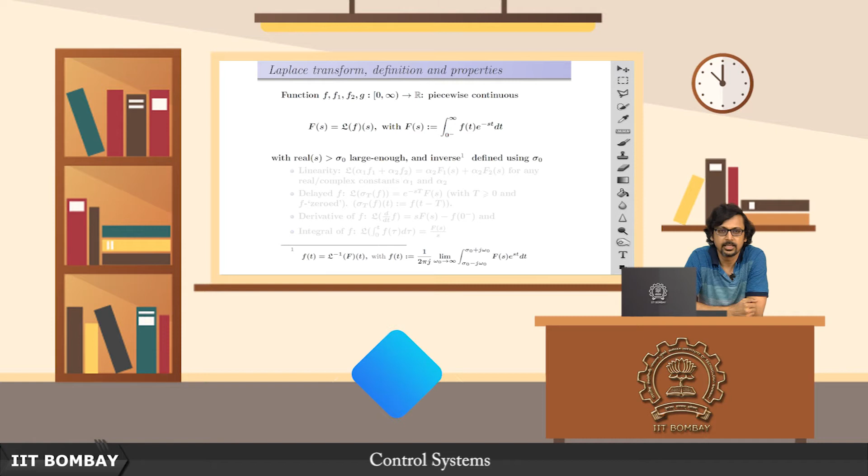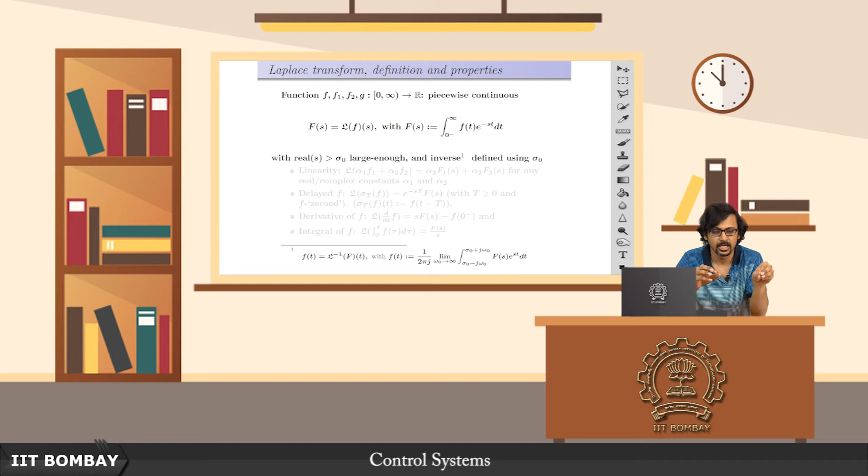In the preceding lectures we have seen how properties like linearity, time invariance and causality of a system play an important role in enabling us to play around with certain properties and to infer about the response of the system for a given input. This is not a trivial question because for different inputs your system will have different kinds of outputs. Only when it is linear can we play around with this, and based on our knowledge about the response of the system to certain signals, we can cook up the response for a linear combination of those possible input signals.

We have also seen the importance of properties like time invariance, and especially its role in enabling us to ascertain the causality of a system given that a system is time invariant. Now where does all of this lead us to?

Towards the end of the last lecture we mentioned something called Laplace transforms, which I am sure many of you are already familiar with from an earlier course on mathematics or signal processing. Nonetheless, in this course on controls we shall look at Laplace transforms in probably a different light to what you have seen thus far. So let us focus on some basics about Laplace transforms, such as the definitions and properties as they are visible on screen here.

For functions f, f1, f2, g, which are defined over the domain from 0 to infinity, basically all possible values of time mapped to some real value, and which must be piecewise continuous, the Laplace transform of such a function, given by big F when the original function in time domain is small f, is defined as the integration from 0 minus to infinity of f of t times e to the power minus st dt.

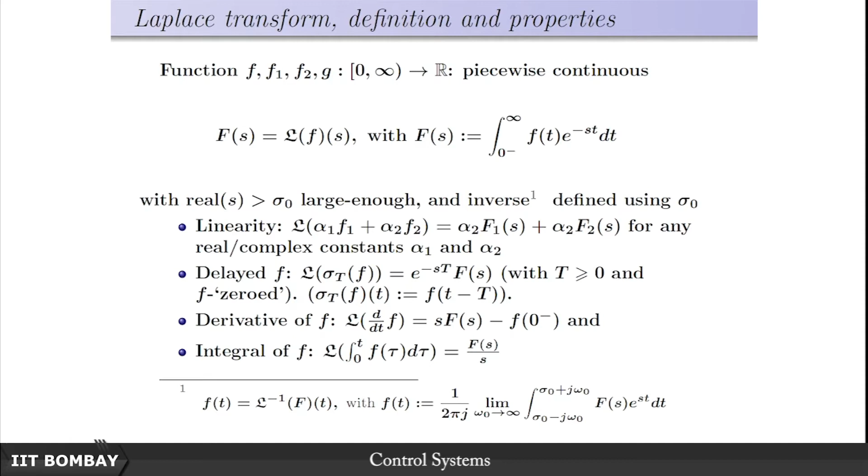Luckily and thankfully, this is not the formula that we shall be using in order to obtain the actual Laplace inverse. But more on that later in some later lecture probably.

Okay, then there are certain other properties which we shall see in this lecture, and why they are significant. One is convolution. It turns out that the convolution operation in the time domain is defined where you integrate from minus infinity to infinity f of tau, g of t minus tau, d tau. The Laplace transform of this convolution of two functions turns out to be the product of the Laplace transforms of the individual functions. Again, this will be important.

Then there's something called Dirac delta. Of course, in many standard textbooks they call it a delta function. I take certain exception to the use of the term function very loosely, because in reality this is something called a distribution. This is not a function in the conventional sense, mostly because at this point it suffices to know that normally a function is defined in a certain manner.

You have a domain of the function, you pick out some element from the domain, pass it through the function, and you get a value which belongs to the range of the function. Dirac delta is not something that's defined in that manner. Rather, as you can see, it is defined by what it does to a function. So Dirac delta is not defined by picking something from the domain, passing it through the Dirac delta, and seeing what's happening in the range.

Rather, you see the action of the Dirac delta on another function, what it does to it, and that's how it is defined. There are some alternate definitions too, but this is primarily a subtle difference. So I wouldn't call it a delta function, although most textbooks would probably do so.

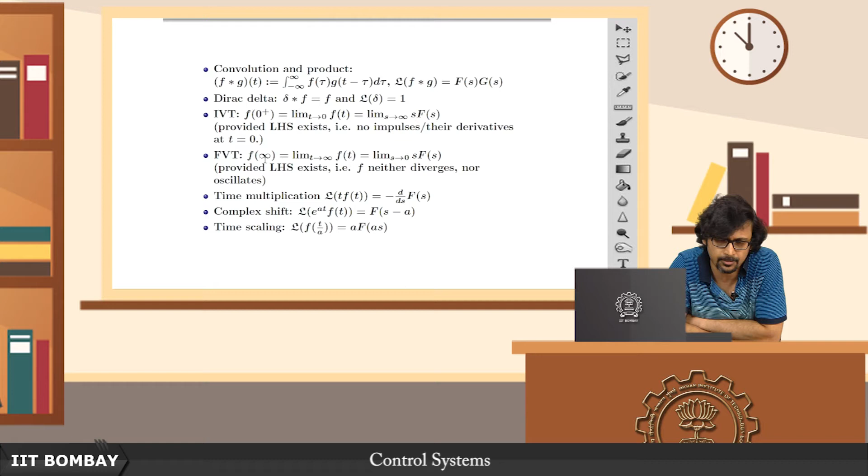Then of course there are those three properties: time domain multiplication, complex shift, and time scaling. These are standard properties that you will find in any textbook, and I am pretty sure if you have gone through a maths course that covered Laplace transform, most of you are already familiar with these. Nonetheless, this is just a refresher.

And finally here we have some standard Laplace transforms. By 1 we denote the unit step - functions are only defined on 0 to infinity, so it is a unit step. The Laplace transform is 1 over s. Then you have t, which is basically the straight line, a ramp, whose Laplace transform is 1 by s squared. Then you have the exponential e to the at, whose Laplace transform is 1 by s minus a.

Similarly you have the Laplace transform of the sinusoid, the cosinusoid, and also a sinusoid or cosinusoid enveloped by an exponential. These are some important functions, and it turns out that even knowledge about these few functions and their Laplace transforms will enable us to get very far within the scope of this course. So with that we end a short refresher of Laplace transforms, and we will begin discussing some important properties in today's lecture, seeing some of those results we've already seen in some new light. Hopefully this will shed new light on what you already know.

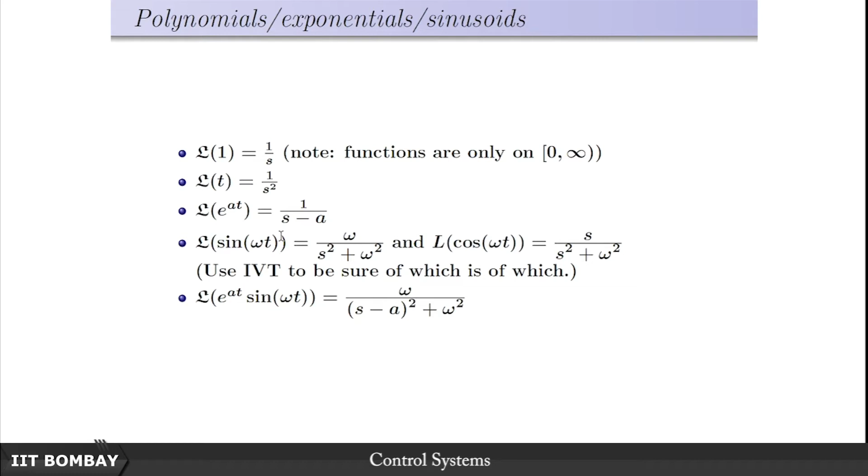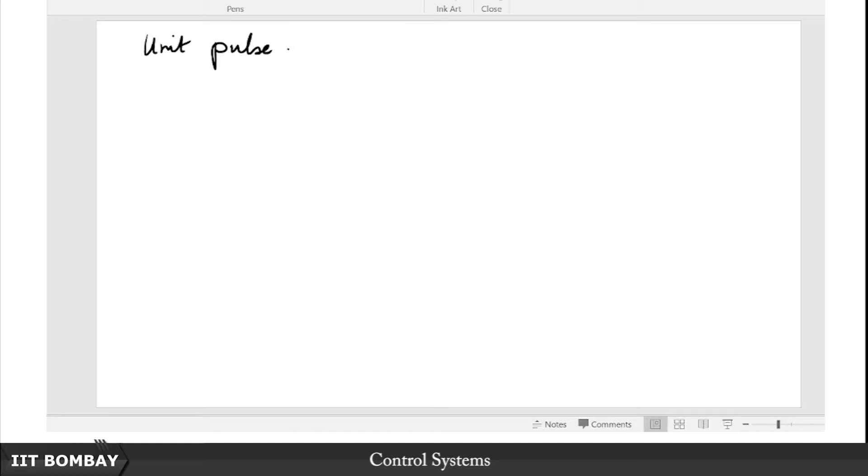At the beginning, if you indulge me a bit, I will discuss something which may not at first glance seem very relevant to what we have seen so far concerning Laplace transforms, but shortly we shall begin to see the connection, I promise. So let us take something called the unit pulse function. Just indulge me a bit and carry on with me on this journey.

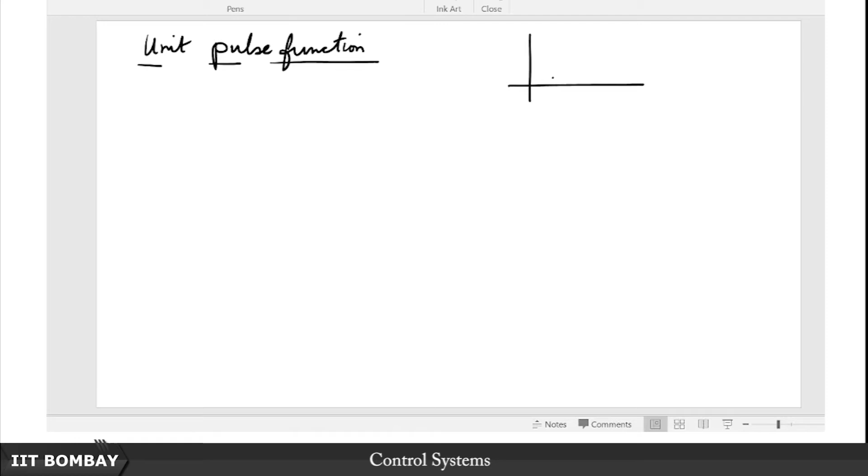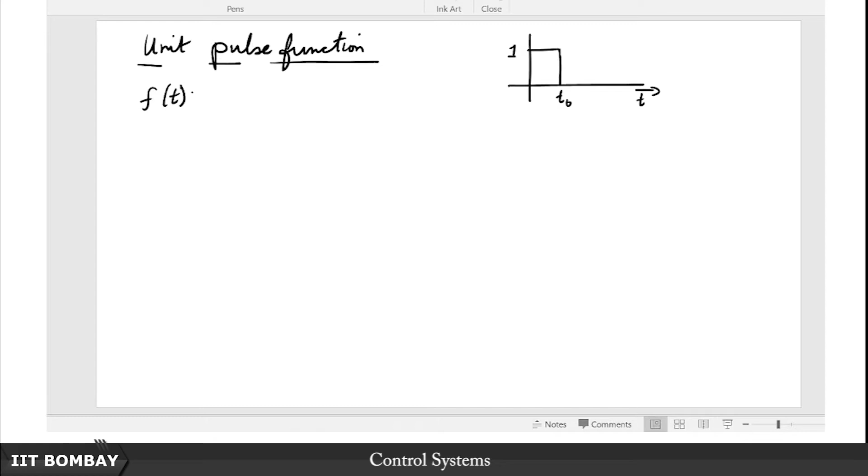How do we define a unit pulse function? The sketch of the function would look something like this. If this is the time axis, this is magnitude of 1, and this is the pulse function - let's say this is t naught on the time axis, and this is what the unit pulse function looks like. So how do we describe this? If you want to describe this mathematically, here is how we would.

Remember that the unit step is defined in this manner: I would define it as 1 of t, and it is equal to 1 for all t greater than 0 and 0 otherwise. So the unit step looks something like this.

Now if I want to compose this unit pulse in terms of the unit step, how do I go about doing this? Let me just correct that a bit.

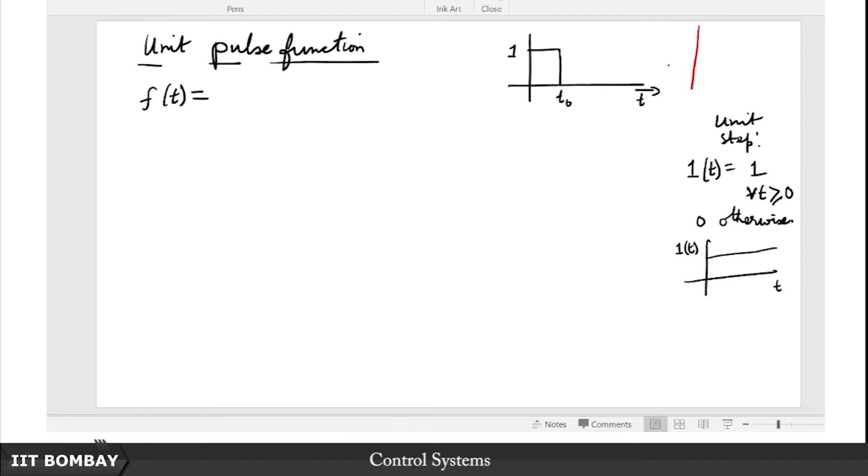So this is greater than or equal to - just a subtle point, but it is important. So how do we then define this? Think of this composition: let's say you have a unit step going on this way, and then at t naught you start another function, a negative step. The resultant of these two would obviously be something like this, is it not? So this is basically what we are looking for - this is the pulse.

So how do we write that mathematically? Without further ado, let me just write it down here. This is nothing but the unit step, and from that you subtract a delayed or shifted version of the same unit step.

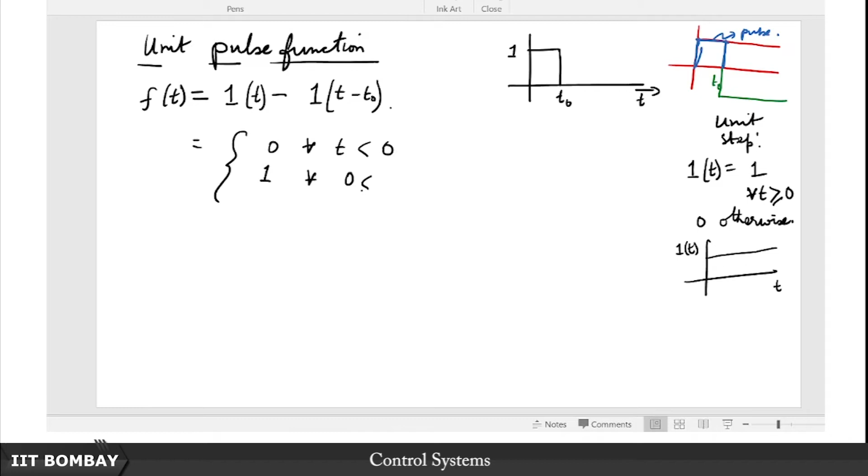So how do we describe this in other words? This is nothing but characterized by the following: it is 0 for all t less than 0, it is 1 for all t satisfying this condition up to t naught, and it is again 0 for all t greater than t naught. No questions about this - this is exactly how it is defined.

Now suppose you want to take the Laplace transform of this f of t. How do we take this? We know that the Laplace transform of this is of course 1 over s.

And what is the Laplace transform of this? This also we know, it's the delay property we've just seen. So this is what it is. In other words, we can write this as 1 minus e to the minus s t naught, over s.

So we'll just bear that in mind for the time being. Let me just write that down: the Laplace transform of f of t is equal to this. This is the point to be taken home from this particular slide and to be remembered for reference later.

So now let's look at some of the properties, as I promised. This will actually help us later on, but first let us look at some of the properties. So for the time being, just remember this result, keep it in the back burner, slowly burning till we need to revisit this. We are sort of trying to cook up the recipe for a lot of things. Let's take a general case.

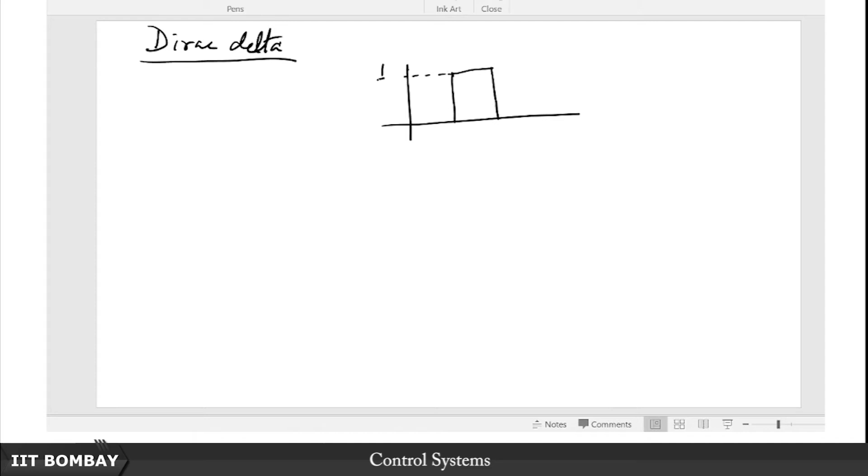Let us first look at something we already know, the pulse we have already discussed. So suppose you have a pulse of magnitude 1 over delta from the instant t1 to t1 plus delta. The area of this pulse is unity, the magnitude, the peak, the amplitude is 1 by delta. So let me define this function delta of t minus t1 as equal to, this is basically this function.

So one way of defining this is, if you look at how we have defined the unit pulse, it would immediately follow that the Dirac delta can be defined, or the approximation of the Dirac delta - we have not yet seen that this is the Dirac delta - the approximation of the Dirac delta can be defined by this expression.

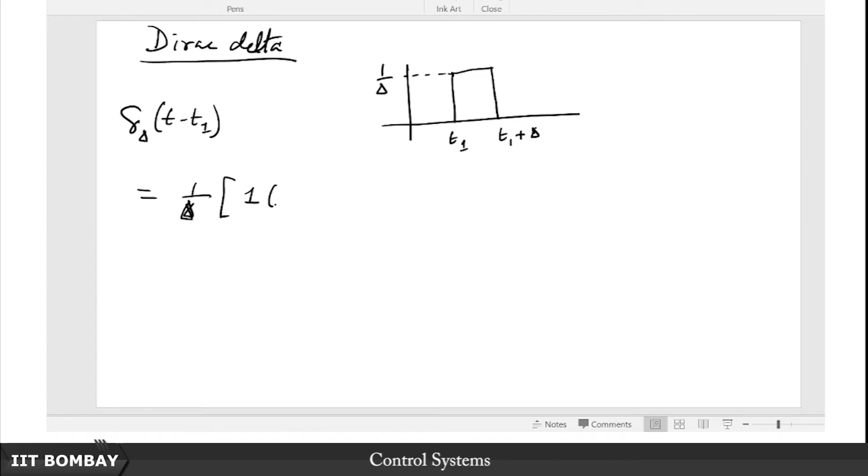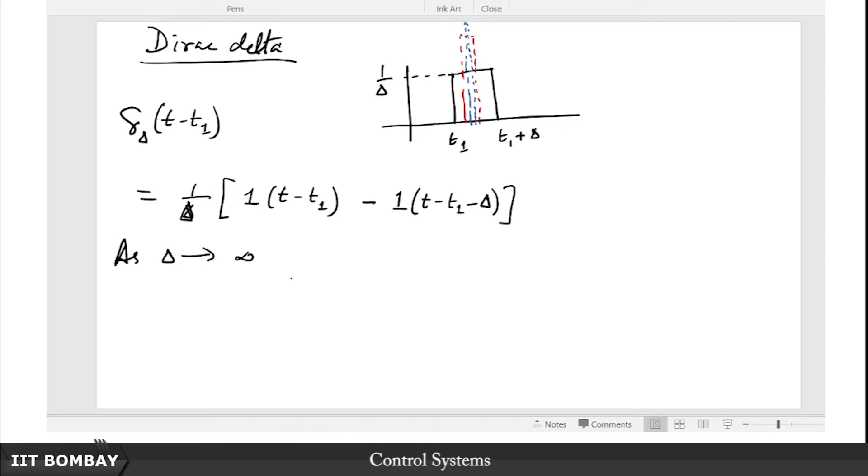I wonder what happens as delta tends to infinity. Pictorially, you can see that this keeps getting narrower and narrower and the peak starts climbing higher. So as you choose a smaller delta, since the area is fixed, you get something like this. Pictorially you can see this, but theoretically what happens here?

It is apparent that as this delta tends to 0, it is not going to be on the center, it is going to approach the left. So as this delta tends to 0, it is going to be like a Dirac delta at t equal to t1. Clearly, as delta tends to 0, this delta of t minus t1 approaches the Dirac delta.

That I hope is at least clear. But what happens in the limit delta tending to 0? In the limit delta tending to 0, the Laplace transform of delta t minus t1 is what we are interested in, and this is the interesting bit.

You see, if you take the Laplace transform of this, this is limit delta tending to 0, 1 over delta, what you have here is e to the minus st1 minus e to the minus s times t1 plus delta. So you can pull out this e to the minus st1, and then what you have is 1 minus e to the minus s delta over delta, limit delta tending to 0.

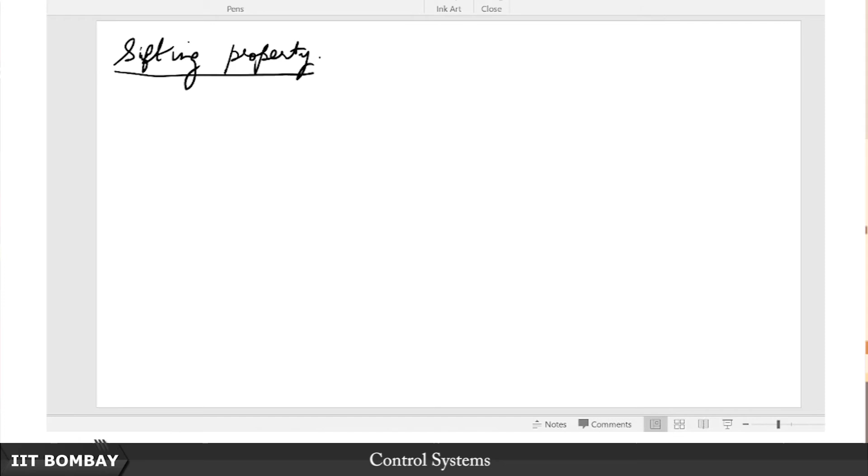An important property of this Dirac delta is the sifting property, so much so that this is also used to define it. If you define the Dirac delta as an approximation in this manner, then the sifting property needs a derivation, remember. But on the other hand, if the sifting property is how you define the Dirac delta, that is, how it acts on another function, then this needs no derivation, it is true by definition. So you should be able to see that the two definitions are actually equivalent.

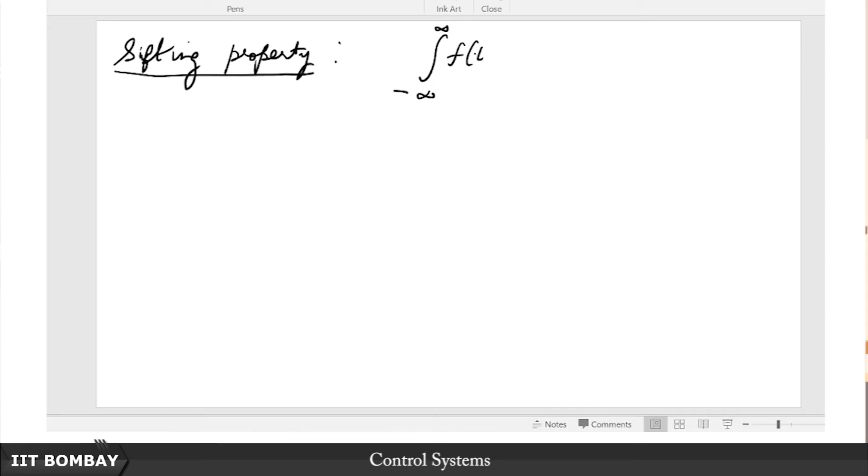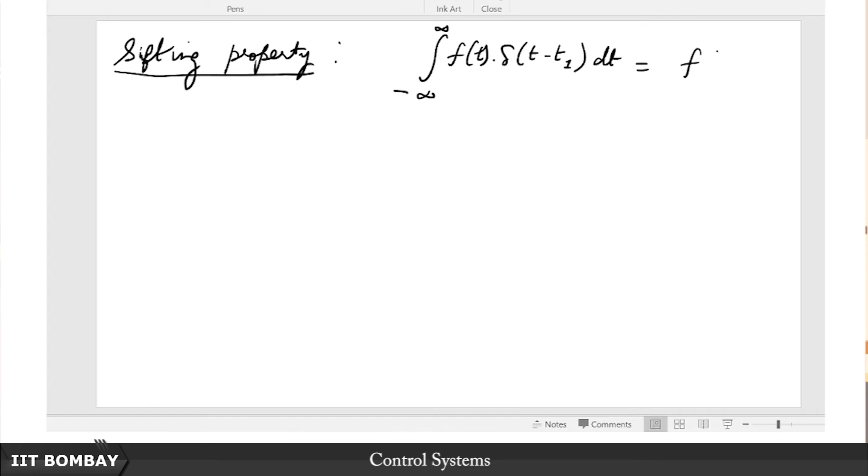So what does the sifting property say? It says that if you take any function f of t and pass it through this sifting or sieving operation, then it is going to pick out the value of that function at t equal to t1. So this is a very, very important property.

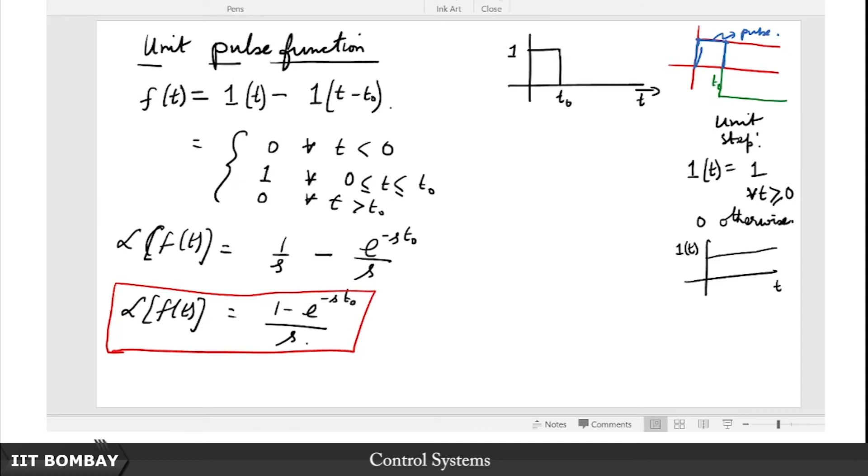Now we are going to look at something interesting, and this is going to be more relevant to our line of inquiry. Consider any signal. Now that we have seen some basic properties, we have seen a unit pulse, we have seen how to cook up the Dirac delta using the unit pulse. In between we have also seen the initial value theorem and the fact that 0 minus makes no difference. Then we have seen the sifting property of the Dirac delta.

Now we are going to see how to express any signal as a train of Dirac delta. How do we do that? This is very important because this is going to eventually allow us to describe the input output behavior of a linear time invariant dynamical system.

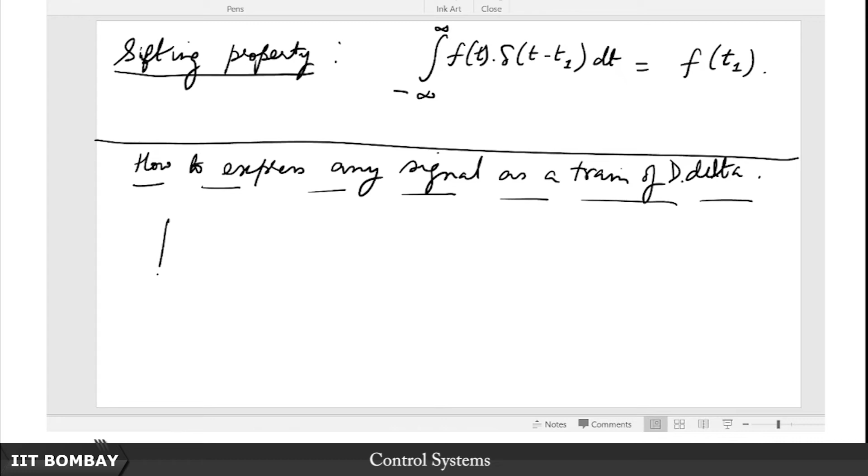So again, as before, we start with a sketch. Let us take a signal, say u of t, some arbitrary signal like this, and like you might have seen in Riemann integration, you split this up into equal intervals, even if they do not look like that. It is exactly like the partitioning for Riemann integration. So you split them up, but if you now focus on each of these individual parts, what are these?

These are nothing but pulses themselves, no. This is like, for instance, a pulse. So let us say that we have split this up from say t0, then t1, till let us say tk.

This is the time axis, and let us call this interval delta, this even interval, equal intervals. That is, t_r minus t_(r-1) for all integer values of r. That is all this means, so it is even intervals, equal intervals, alright.

So now we can cook up another function u delta from u. So u delta t1, or let us say ti, t0, t1, similarly there is some ti here. Let us say we want to find out what is u delta ti. What function is that? Let us say it is just this function, this pulse here.

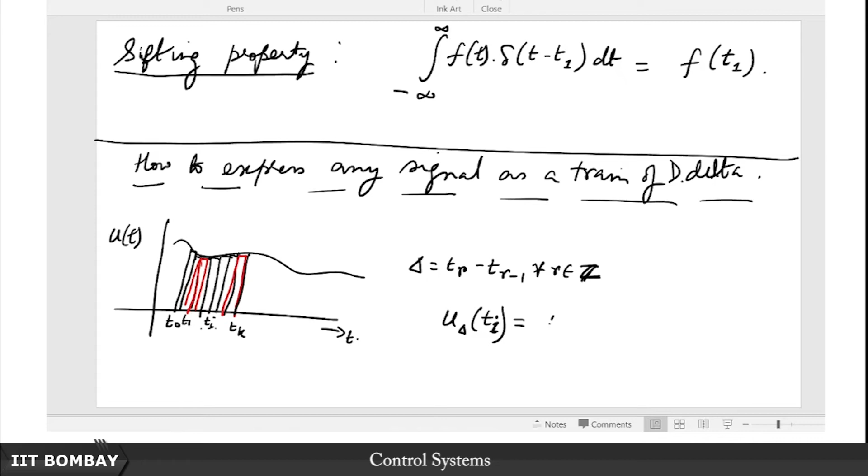Now once we define this as a pulse, we are approximating this as a pulse, we know how to express this pulse. It is very simple. What is the magnitude, the amplitude of that pulse? It is exactly the value of u at ti. So this is the amplitude of that pulse. And how do we express that pulse?

We have seen that we can express this pulse. Let me take you back here. Remember, this is basically a pulse of amplitude 1 over delta. So if you want to make this a unit pulse, you have to multiply this by delta. Remember, we saw this could be approximated to the Dirac delta, but the difference is that this pulse had an amplitude 1 over delta.

Here we want a pulse whose amplitude is u of ti. So when we multiply this with t minus ti, this pulse, we also need to adjust and multiply with delta, because this overall thing is going to be a pulse of amplitude unity, and when multiplied by u of ti, it gives us exactly the pulse of amplitude u(ti). So this is one individual piece, one individual slice.

So now combining all of this, let me cook up an approximation of u(t), which is given by u-bar of t. This is an approximation of u(t), and we can clearly define this through this summation, this infinite summation, i equals 0 to infinity, of course countably infinite, of u(ti) delta(t minus ti) times delta. We have seen that.

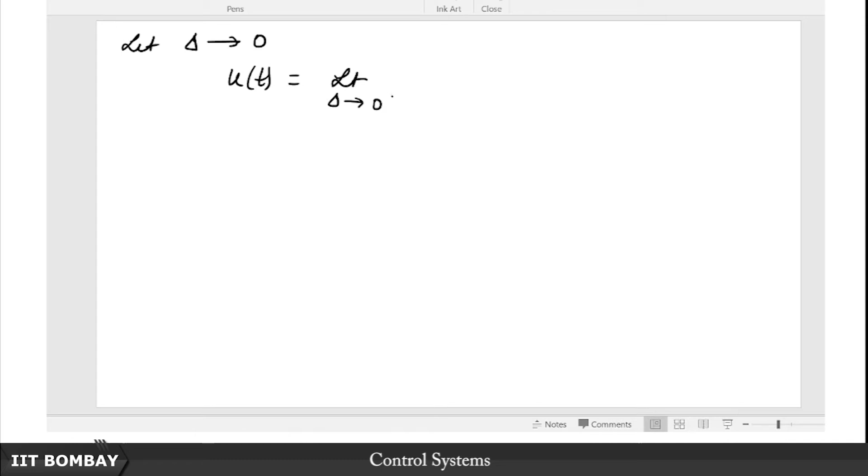So we can write this as the limit as delta tends to 0 of that same summation, u(ti) delta(t minus ti) times delta. But this is nothing but something we already recognize, right? This is basically an integration, is it not? When you let delta tend to 0, this delta term becomes d tau, so we can easily replace this by the integration operation. It might appear a little hand-waving at this point, but as delta tends to 0, this approximates the Dirac delta and gets closer and closer. This delta is like d tau, and u of tau is basically the running variable then.

Alright, so we have seen that this is one way of expressing any signal. But what is our motivation behind doing all of this? Why are we doing this in the first place? At this point let us focus on that.

Essentially what we want to find out is, suppose you apply this input u(t) to a linear time invariant system described by G, then what is the output? That is our question. Can we express this output in terms of the input, and how do linearity and time invariance and all those properties help us here? Now that we have described u(t) in this fashion, we should go ahead and try to do this. So we know that y(t) is nothing but G acting on u(t). Remember in the previous lecture we had removed this third bracket for brevity, but we bring it back now.

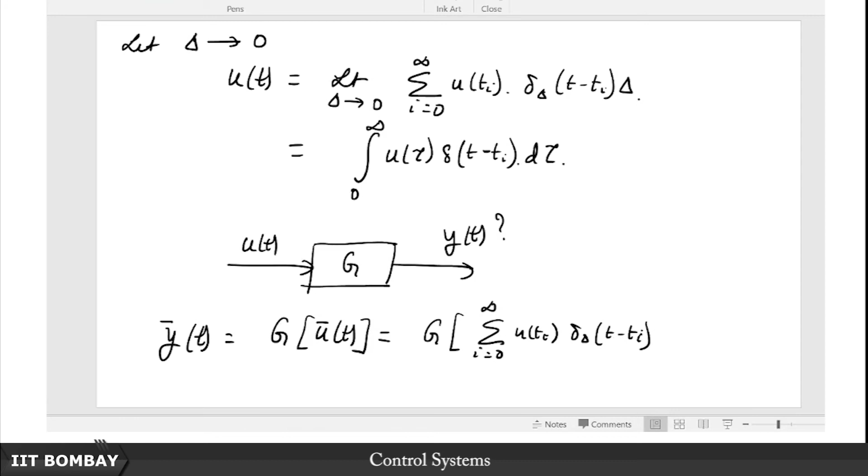So what is this? Going back one step further, let's say we want an approximation of this - we want to find out the response of u bar. So we write this as the summation, I equal to 0 to infinity, of u of ti delta delta of t minus ti. We like a discrete sum because that will help us push through the property of linearity.

We shall see that. Now notice in this sum, if G happens to be a linear system, then the action of G on a sum of these type of signals is the same as the sum of the action of G on individual signals - that is what linearity is. And here what are the scaling factors, the constants? Remember u of ti is held constant over the interval from ti to ti plus delta.

Now remember that in this summation, I can insert this g inside the summation only because this g is linear, and the second point is that this delta is going to be a constant. So when we later transform this to an integral, this delta will play the role of dt or d tau, whatever the running variable is. In fact it will be d tau, as we shall see.

So therefore we have y bar of t, the approximate response, and here is where the smoothness of g is very important, because we are taking infinite sums. I'm not asking you to prove this or get into the depths of what the smoothness of g is, but because we are taking these infinite sums, smoothness is what we concerned ourselves with in an earlier lecture.

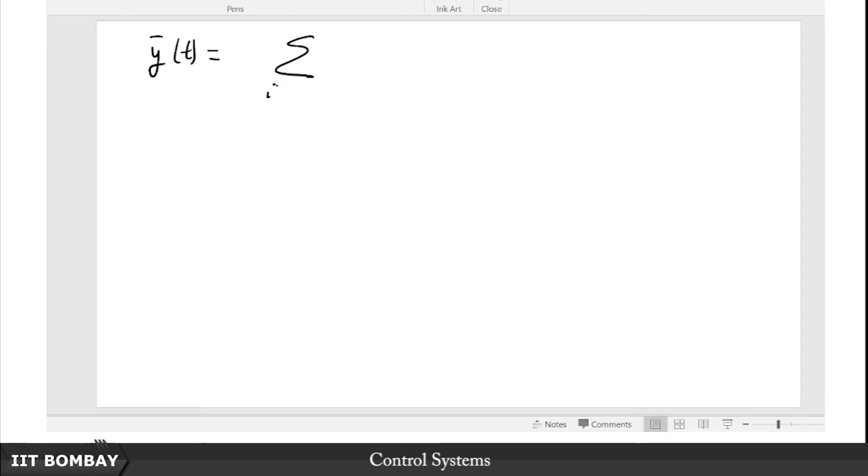So what does that tell us? We can pull out this u ti outside g, and also this delta outside g. Once we've done that, we can write this as summation I equal to 0 to infinity, g delta t minus ti, delta times u ti. And now let delta tend to 0.

So if we let delta tend to 0, what happens? This reduces to an integral, but even before that, notice what this tells me: it tells me that if I know how my system responds to each of those individual pulses, I can cook up my overall response of the system.

That is the beauty of linearity - that is why we were so hung up on this property of linearity. So before we pass this through a limit, let me make a side note: g of delta delta t minus ti - this is an important thing. This is basically the response of the system at time t for an input - what sort of input? Input delta delta applied at time ti.

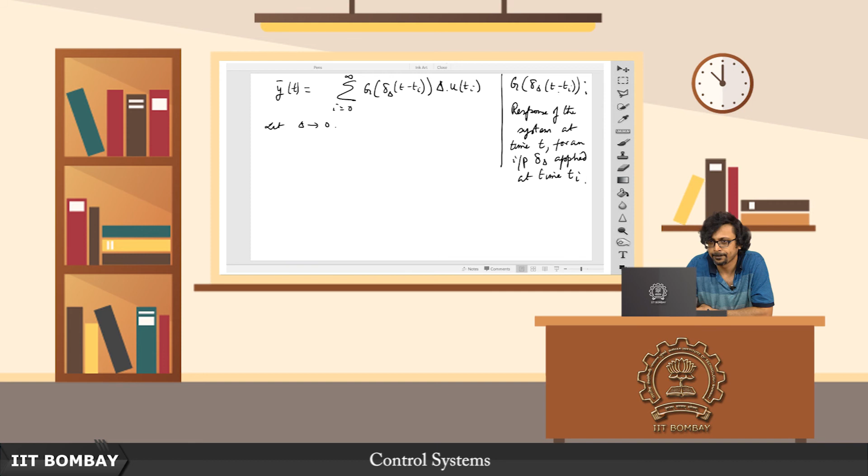This is how this quantity is defined. Notice that because implicitly there is this notion of time invariance, only this difference between t and ti matters here. It doesn't matter whether t and ti are respectively 105 and 100, or 1005 and 1000, because it is time invariant and linear - therefore it's only the difference between the instant of application of the input and the instant of observation of the output that matters. So all these properties we focused on in earlier lectures begin to come together here - we see the pieces in the puzzle coming together.

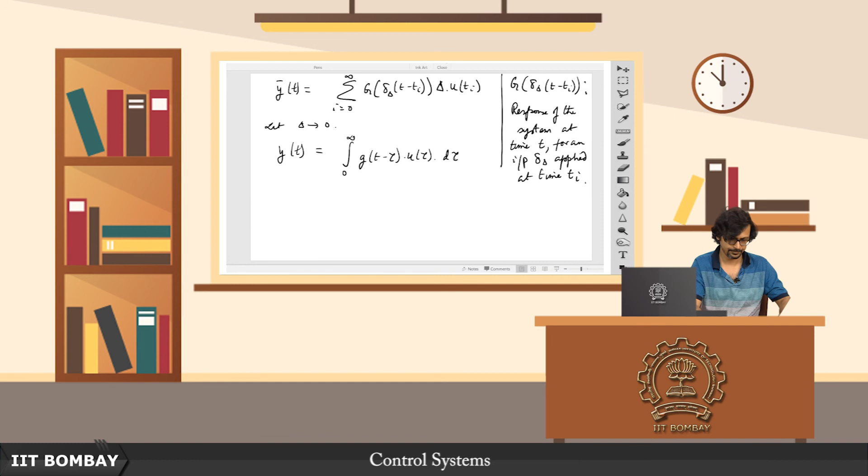Now getting back to this limiting business: if we pass this through a limit, we can clearly see that this approximation error and this y bar can be removed and replaced by y, because this approximation error can be nullified. So then we can write this as the integral from 0 to infinity of g of t minus tau, u of tau, d tau, for t greater than tau.

Yeah, so that is essentially what this is. Now clearly, by the same token as this was important in the approximate version, the variable or object of our interest is this, because this is essentially what is capturing whatever the system is doing to our input signal. So this is very special.

This g of t minus tau is basically defined as the impulse response of the system at t due to delta of t minus tau applied at tau. What that means is, if you apply the Dirac delta at the instant t equals tau, and at some later instant t you want to observe the effect, then it is this g of t minus tau that tells you exactly what that effect is.

In other words, if you know how your system responds to these impulses applied at different time instants, because you can cook up your input signal using these trains of impulses, you can basically cook up the response to any signal. The critical piece in this puzzle is understanding this g, this g of t minus tau. That is why this is the most important quantity insofar as our studies are concerned.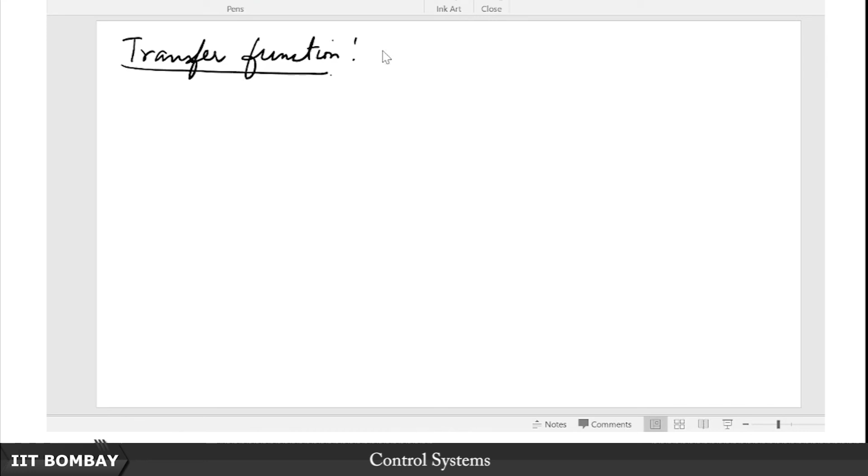So in our bid to do that, the first thing we do is define something called a transfer function. What is a transfer function? Quite simply put, now that we have seen what this impulse response is, the transfer function is nothing but the Laplace transform of the impulse response.

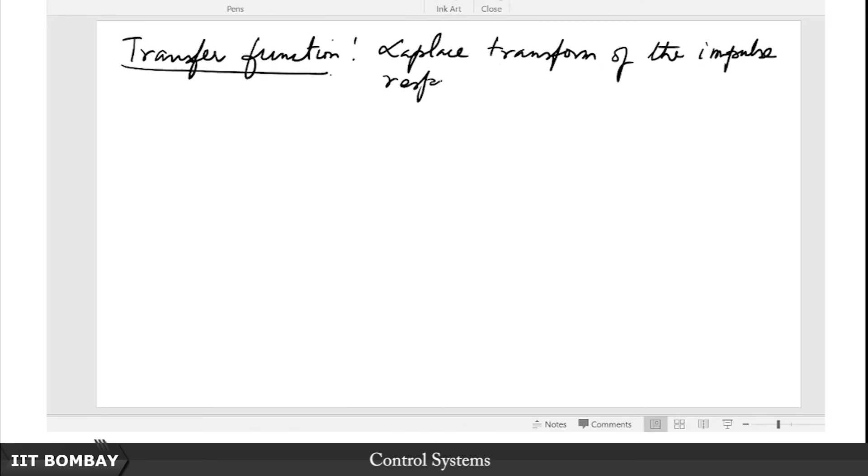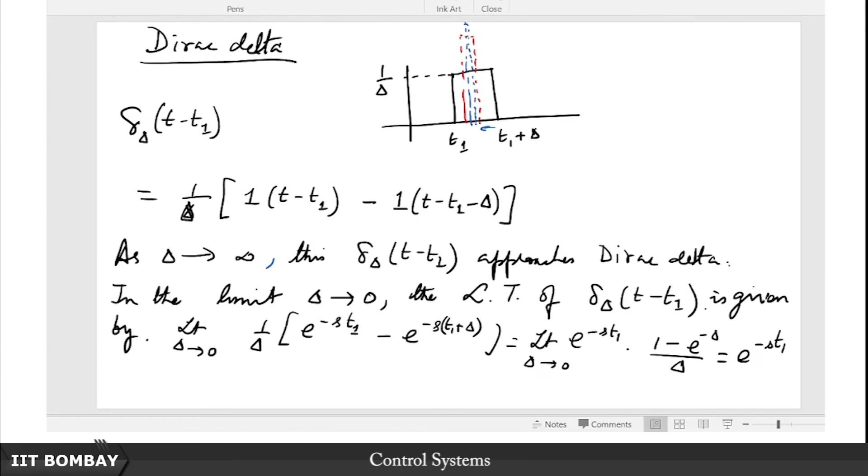So to quickly recapitulate what we have seen in this lecture so far: we've seen first the unit pulse, then we took a brief digression and saw that this initial value theorem does not change by changing the lower limit of the Laplace transform from 0 plus to 0 minus. Then we focused on the Dirac delta, its approximation, and how we can make that approximation converge to the actual Dirac delta by letting delta tend to 0.

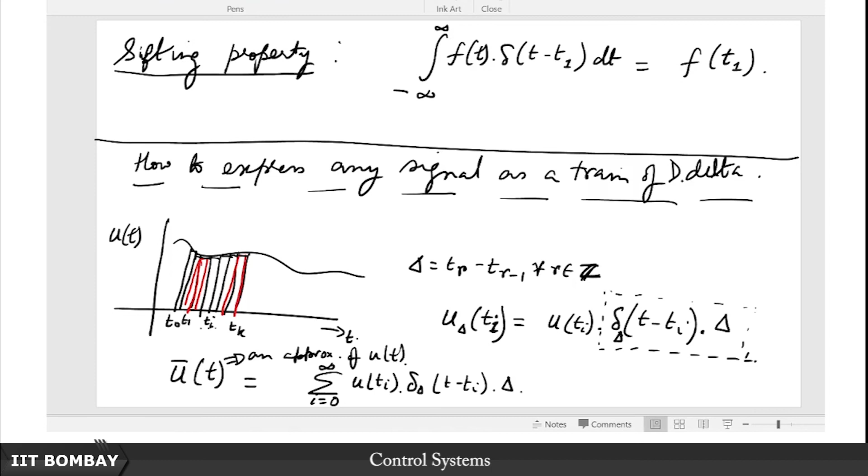Then we have seen the sifting property, by which some people also define the Dirac delta. Thereafter we have seen how to express any signal as a train of Dirac delta functions, and after doing that we have seen how we can study the effect of any linear time invariant system on a signal when we have cooked up the signal using Dirac deltas.

How? We have seen that if we understand how the system acts on this Dirac delta, captured by the so-called impulse response, then we can cook up the output, the response of the system to any input. This integration might seem familiar — we have already seen this in the earlier part of the lecture. This is the convolution integral.

So now, finally, after having seen all of this, we want to see the connection between what we have studied so far in the time domain and the Laplace transform from earlier in this lecture. We see, quite simply, that whatever this g is doing in the time domain with all these integrals and convolution, the same thing can be captured by a transfer function, defined as the Laplace transform of the impulse response.

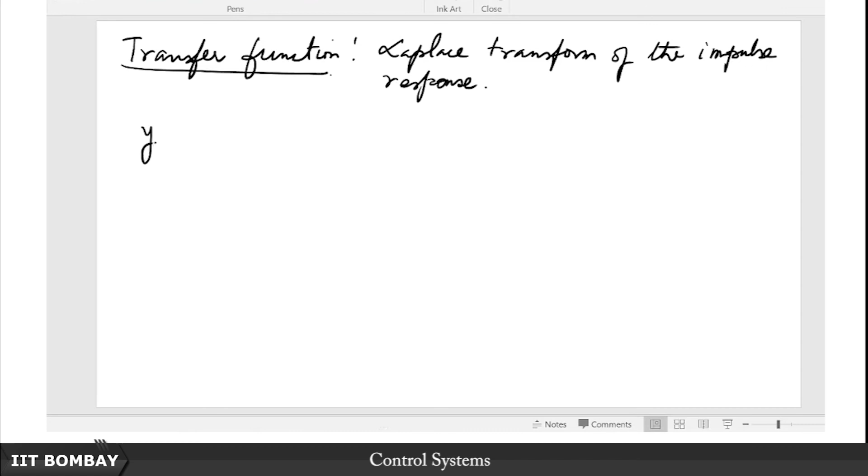So let us quickly take a look at this and then we will wind up with this transfer function description today. So let us say we have y of t, as we have seen from the previous slide, equal to the integral from 0 to infinity of g of t minus tau, u of tau, d tau.

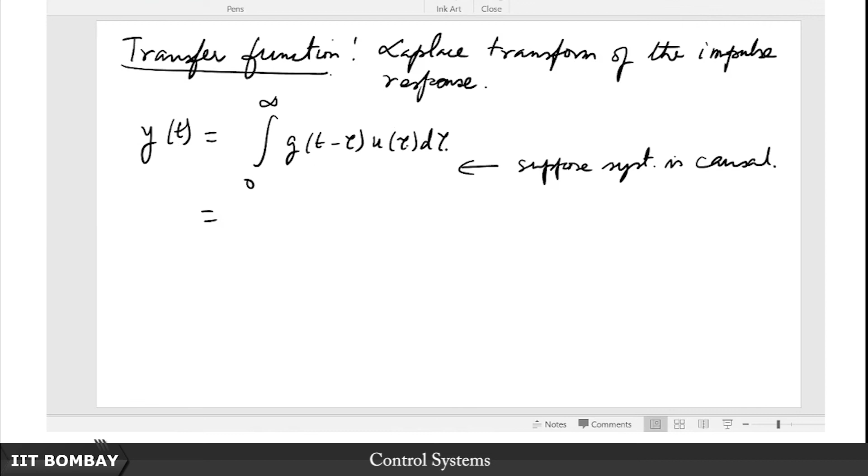Now suppose at this point we impose that the system is causal. If the system is causal, then what do we know? The response at time t cannot depend on the input for any time instant greater than t. So whatever values the signal u tau takes for any instant greater than t will not affect this. Therefore we can safely take the limit of this integration from 0 to t.

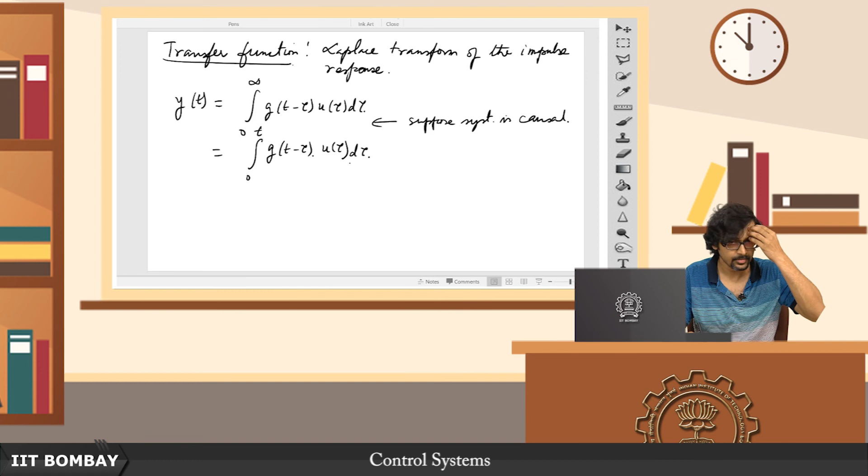Yeah, this is what causality will allow us to do, right? Once we have seen that, this is basically what you have seen most likely as the convolution integral.

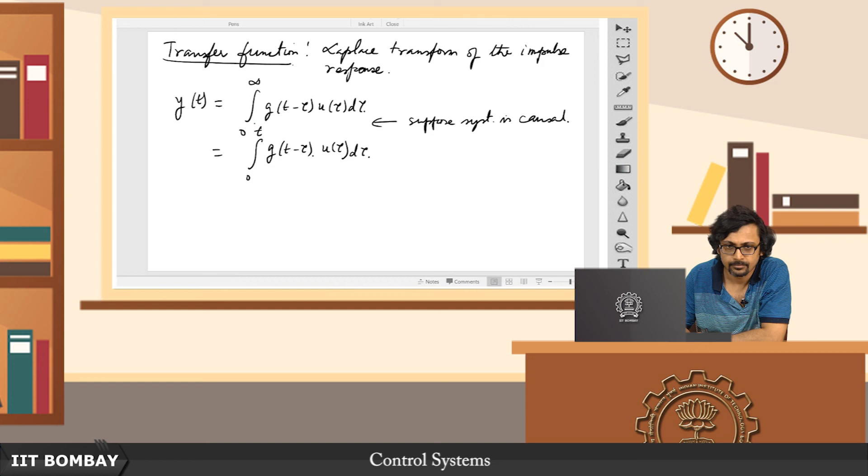So we call this the convolution integral. Remember, although this looks exactly like the convolution integral, this limit can only be changed to this when the system is causal. Each of those properties that we have studied, they are indeed important.

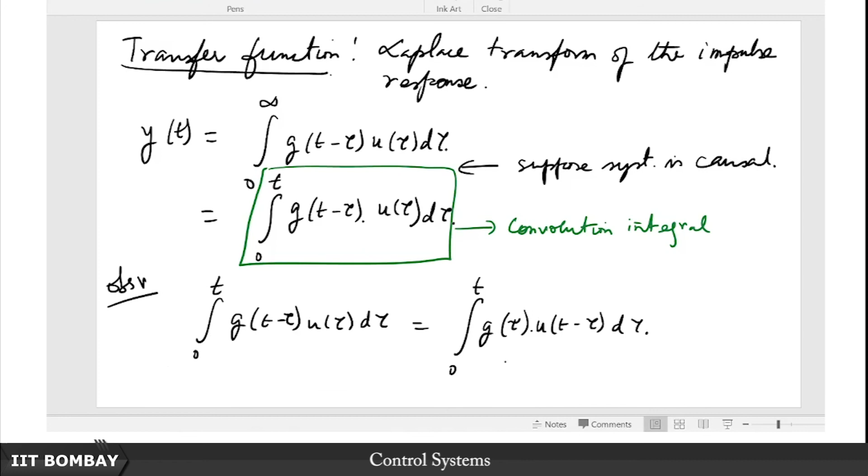Now it is quite straightforward to see that it is just a change of variables: g of t minus tau, u tau, d tau. This is an observation. You can also check this, it is quite straightforward, that g of tau, u of t minus tau, d tau. Just replace the variable t minus tau with z and adjust the integration and the dz accordingly. So with this observation in mind, we'll move forward.

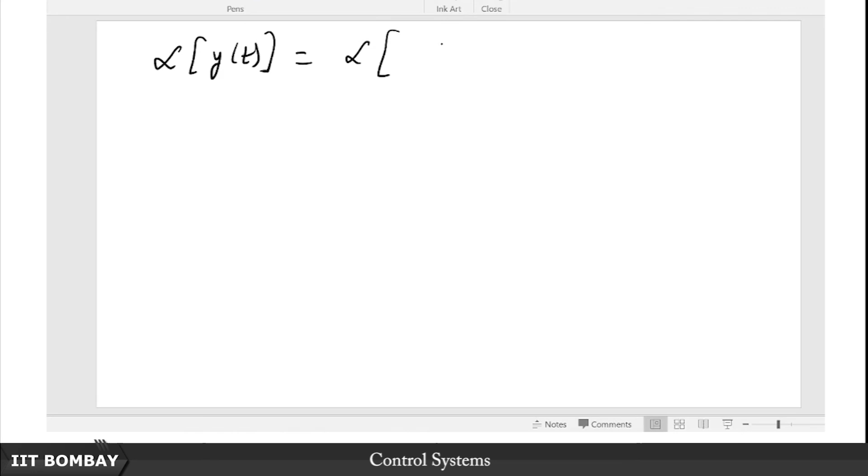So now that we've described y of t, let's take the Laplace transform of y of t. What is the Laplace transform of y of t? It is nothing but the Laplace transform of whatever we've defined so far: 0 to t, g of t minus tau, u tau, d tau, which can in turn be written, by our observation from the previous slide, as the Laplace transform of 0 to t, g of tau, u of t minus tau, d tau.

Now let us try to understand what this u of t minus tau looks like. Suppose we assume initially — and this is an assumption, important to put forward — that everything is relaxed. What that means is that your u, or rather u tau, since tau is your running variable, let us say this is u tau.

Before t is equal to 0, it is 0. Then if you look at u of minus tau, it is going to proceed in the negative direction of time. And if you take u of t minus tau, it is going to be shifted to the right by t. This is the tau axis, and this is the tau axis. So u of t minus tau looks something like this.

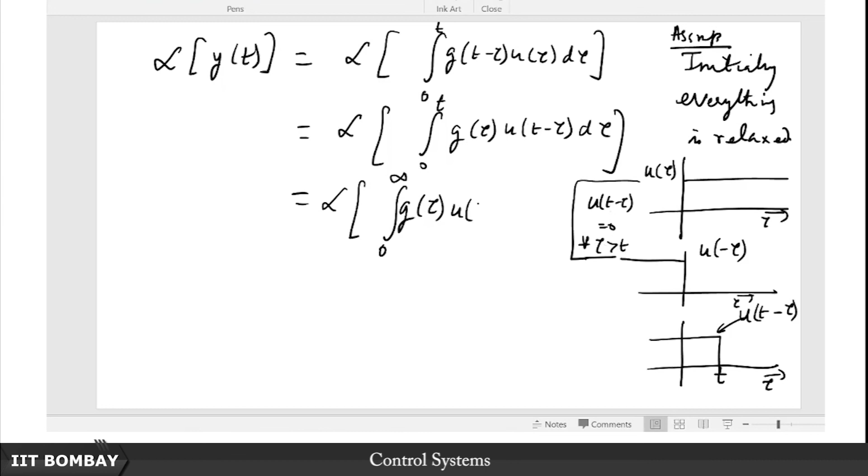Now you notice that if you change this limit of the integral from 0 to infinity instead of t, it will matter not, because for tau greater than t, this is already going to be 0. So you can already write this as u of t minus tau, because this fellow, by virtue of this property — which is also by virtue of this initial relaxation — will ensure that for all tau greater than t, this is going to be 0 in any case. So it does not matter if I extend the upper limit of this integration from t to infinity.

Okay, how is that going to help? So in the next step, instead of writing this L, we actually use the definition of the Laplace transform. It is basically 0 to infinity, and then we put this whole stuff inside: 0 to infinity, g of tau, u of t minus tau, d tau. Of course then you have to have e to the minus st, dt.

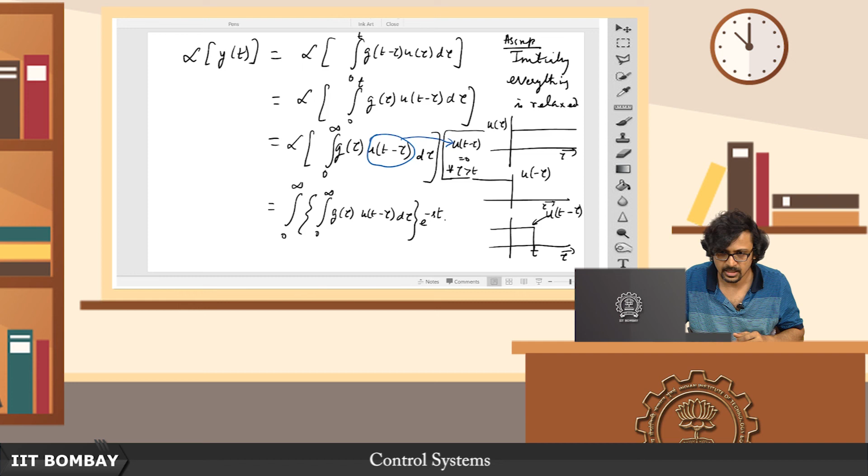So then we have L of yt equal to two back to back integrations, both from the same limit, and that is the beauty of it. That is the reason why we carried out this change of upper limit, although it did not matter, but this will enable us to interchange these. We will see shortly how that helps.

So then this is nothing but g of tau, u of t minus tau, e to the minus st dt d tau. Now I can make another clever change here: write this as e to the power minus s tau, times e to the power minus s times t minus tau. The order of integration will not matter at this point, because the limits have already been made the same. That is exactly the idea behind all of this operation.

So where does that lead us next? We can take these two separately: the integral from 0 to infinity of g of tau e to the minus s tau, and then the integral from 0 to infinity of u of t minus tau, e to the minus s times t minus tau, dt d tau.

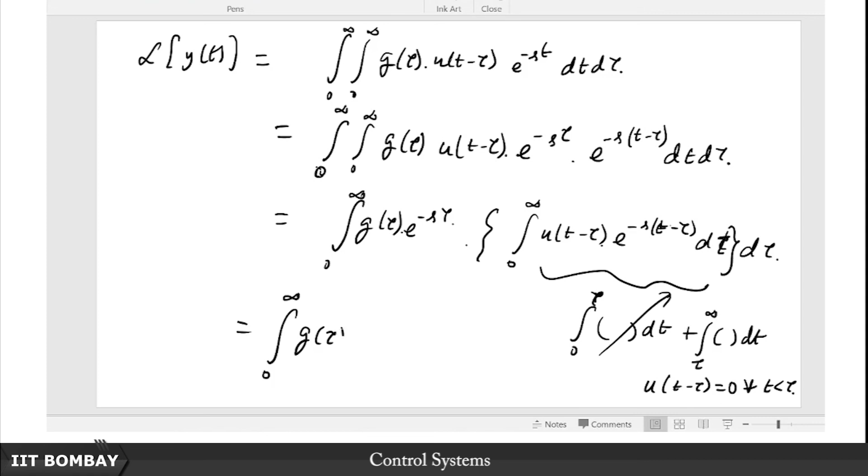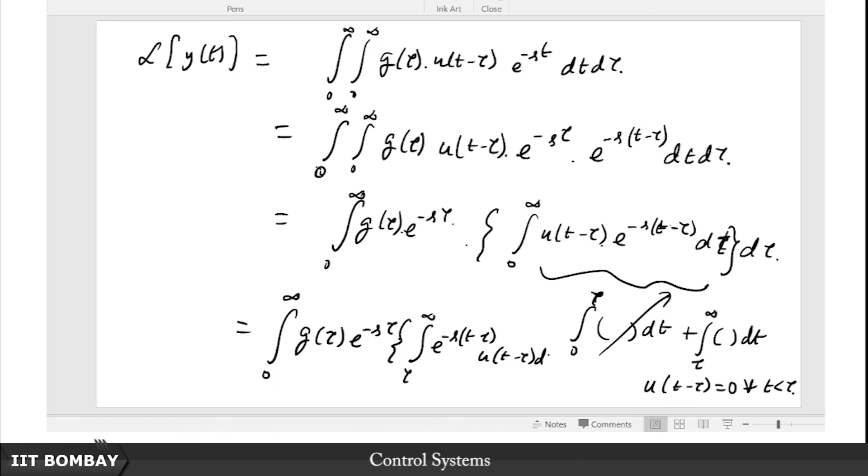So eventually what you will be left with is the integral from 0 to infinity of g of tau e to the minus s tau, times the integral from tau to infinity of e to the minus s times t minus tau, u of t minus tau dt, d tau. Now if you substitute t minus tau as gamma, or any running variable like z, you will see this eventually turns out to be the Laplace transform in terms of that variable.

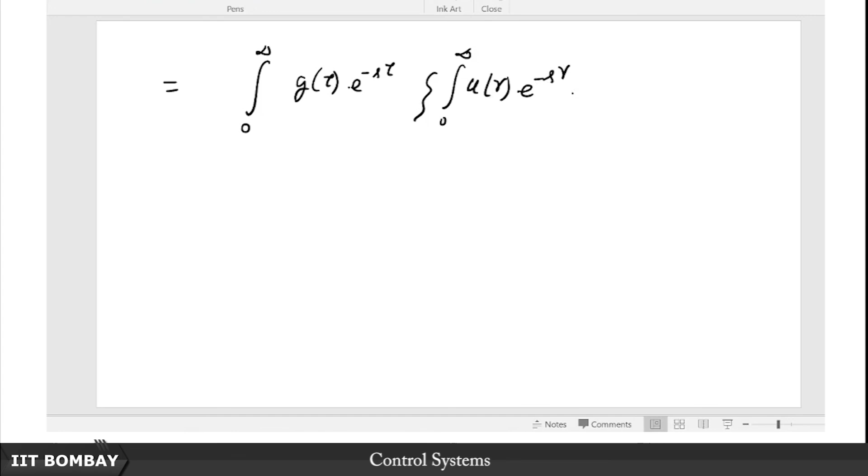In other words, this finally leads you to: integration from 0 to infinity of g of tau e to the minus s tau, times integration from 0 to infinity of u of gamma, e to the minus s gamma d gamma. You can take that as an exercise, it's just a change of variables. Of course you can also separate this and bring the d tau here.

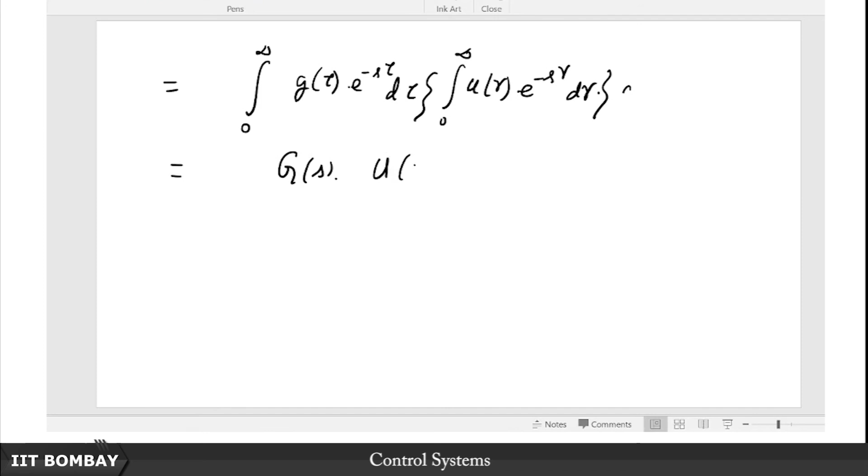So what does that mean? This is nothing but g of s times u of s. Remember, we have always been talking about this, but we mentioned that while dealing with this as an operator in our earlier lectures, we saw that when we wrote y equal to g of u, or sometimes omitted the bracket, we were careful to clarify that this is not a multiplication in general.

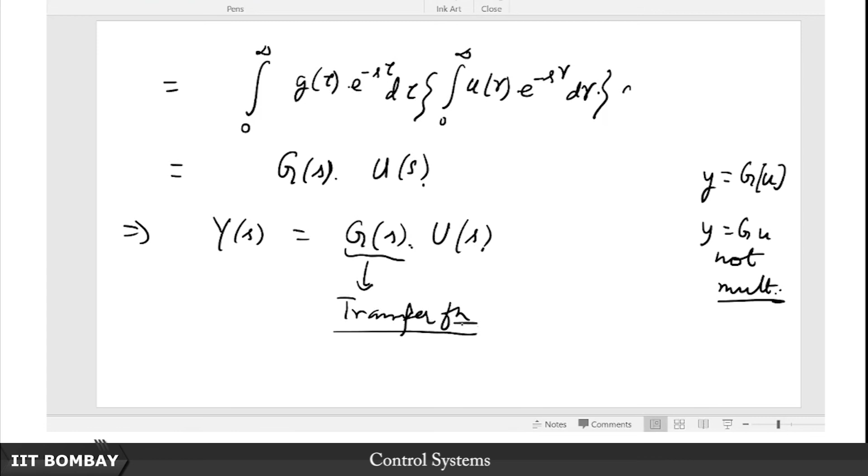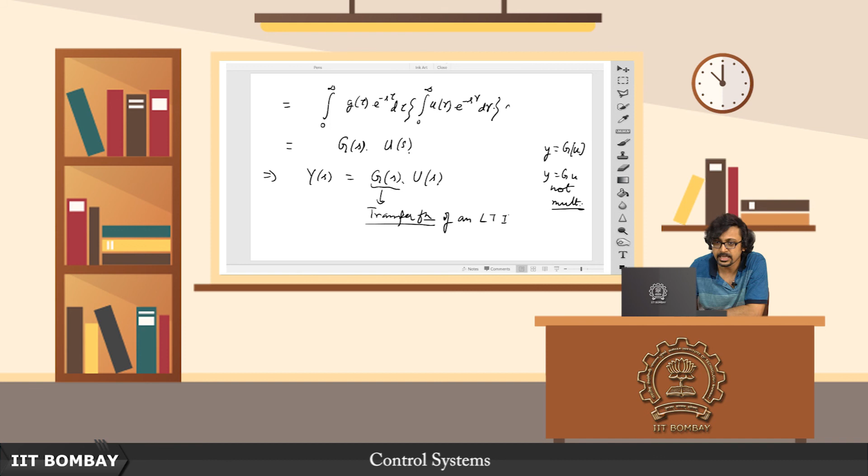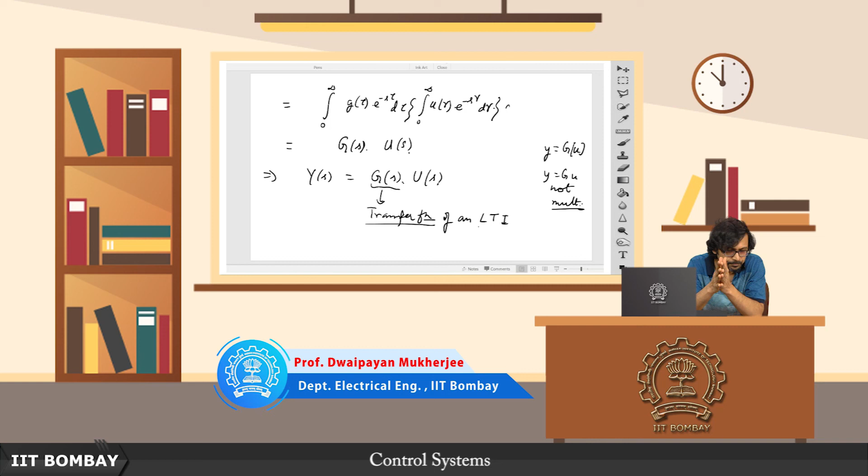But now, once you are dealing with it in the Laplace domain, it is indeed just a product of the Laplace transform of the impulse response and the Laplace transform of the input. So much so that this is what we call the transfer function, defined as the Laplace transform of the impulse response. This is basically the transfer function of an LTI system, a linear time invariant system. So this is how we derive the transfer function—this is in essence what captures everything you need to know about the linear time invariant system.

In the next lecture we will see further how we can derive these transfer functions for different systems, especially ones described by constant coefficient differential equations, and we will see some other interesting properties. Thank you.